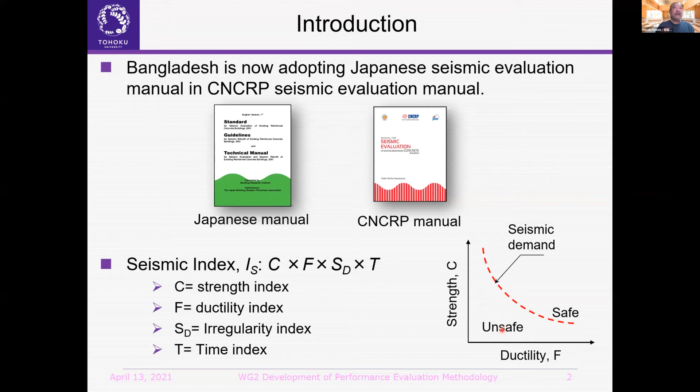The details were already explained in the method for the evaluation of the IS index. So today it's a very good opportunity for me to introduce the background of the IS index for the application to existing building structures just after the earthquake. As Rafikul-san already introduced, the judging criterion for the IS index is 0.6. If the IS index is larger than 0.6, in Japan we consider the seismic capacity is enough against major earthquakes.

And this kind of judging criterion is not only theoretical investigation, but application to damaging earthquakes, and we learned lessons from this earthquake damage. Today I would like to show two examples of the application to existing building structures in Japan. And this is just the case in Japan. We are not thinking this judging criterion is directly applied to Bangladesh, because building type, seismicity and many things are different.

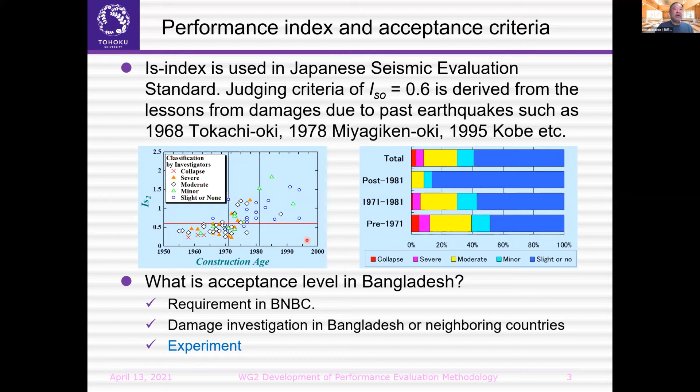So maybe we need to discuss more how much IS index is good for the judging criterion in Bangladesh in the application. But anyway, how we decided and confirmed the IS index of 0.6 is okay, that is our Japanese experience. Please see this. This figure is showing the damage ratio due to the 1995 Kobe earthquake for school buildings. Most of the buildings are 3 or 4 story reinforced concrete structures, and this is the damage ratio of the buildings.

We classified the buildings into 3 groups based on the seismic code revision. In Japan, we revised the seismic design code based on the lessons from earthquakes. The first major revision was done in 1971, and the second one in 1981. The damage ratio is very different based on the seismic code. In the first generation, almost 10% of buildings suffered very severe damage or collapsed, and 30% were moderately damaged. Moderate damage means it is possible to repair, but very heavy repair is necessary.

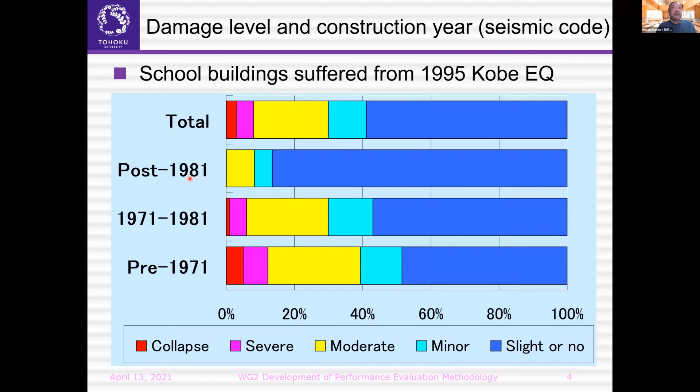And this graph is the same school building, and the vertical axis is the IS index, seismic capacity. And this line, 0.6, is the judging criteria. And this line is construction years, so 1971 and 1981. So here is the first generation, second generation, and third generation.

So again, the tendency is very clear. Before 1971, for most of the buildings the IS index is less than 0.6. And after 81, the data is very few, but for all the buildings the IS index is larger than 0.6. This mark indicates the damage level: collapse, severe or moderate damage. So most of the severely damaged, collapsed or moderately damaged buildings are less than 0.6.

So based on such kind of analysis, we decided to confirm the IS index works well to judge the seismic capacity of building structures. And I think fortunately in Bangladesh, you don't have this kind of severe earthquake. That is why it's a little bit difficult to do the same kind of work on Bangladesh buildings, but maybe you can collect some data not only from Bangladesh but from outside your country. Then you can discuss or check which level is suitable for the judging criteria for seismic evaluation.

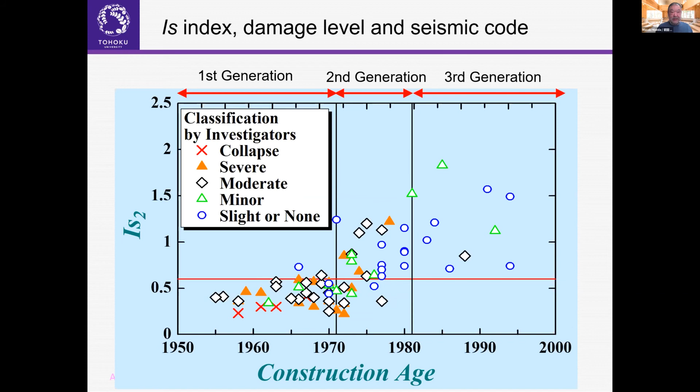And next I'd like to talk about the basic idea of the seismic evaluation or rehabilitation flowcharts in our SATREPS guideline. Of course, our guideline works together with the CNCRP manual. Maybe today we do not have enough time, and I guess we already introduced the visual rating method, a very rapid evaluation or classification of seismic capacity of building structures. In the seismic evaluation stage, we are thinking to prepare two levels, first level evaluation and second level evaluation. This is basically based on a very simple calculation method.

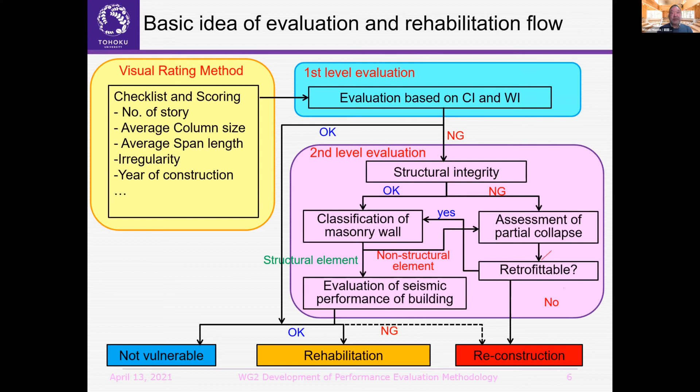But anyway, in our seismic evaluation manual, first we need to consider the structural integrity, and one of the biggest differences between Japan and Bangladesh is the masonry infill wall. In Japan, the masonry infill wall is not popular, so in seismic evaluation it is not taken into account. But in Bangladesh, the masonry infill wall is very popular. That is why we developed some calculation method for the masonry infill. This figure was already explained by Rafikul-san.

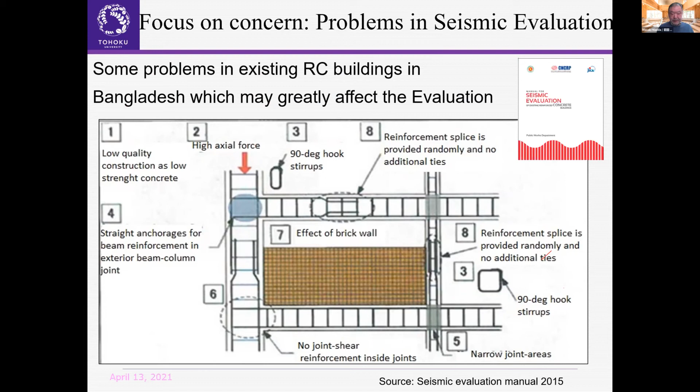At the beginning of our project, we discussed, and the Bangladesh side showed some typical problems to be considered in seismic evaluation. Based on discussion of these characteristics, we picked up the things to be considered in our SATREPS-TSUIB guideline. So from now, after my presentation, 5 items will be presented. We mainly focus on these 5 items for the seismic evaluation, in addition to the CNCRP manual. The first one is the masonry infill wall.

The second one: sometimes in your country the concrete strength is low. In such cases, the failure mechanism, deformation capacity or strength is different from the normal concrete structure. Another very typical structure is flat plate structures. In Japan, the frame structure is very popular, but in Bangladesh, the flat plate structure is very popular. So that's why this is included.

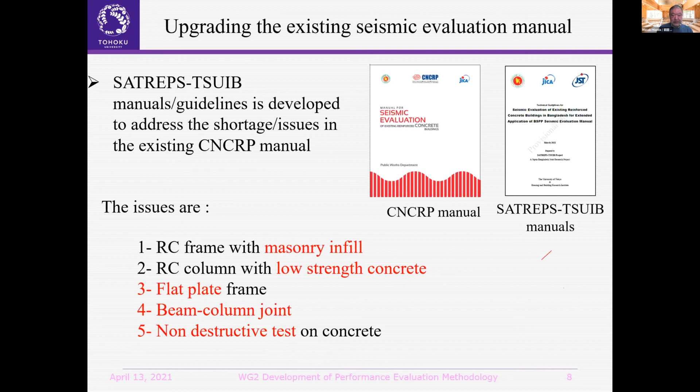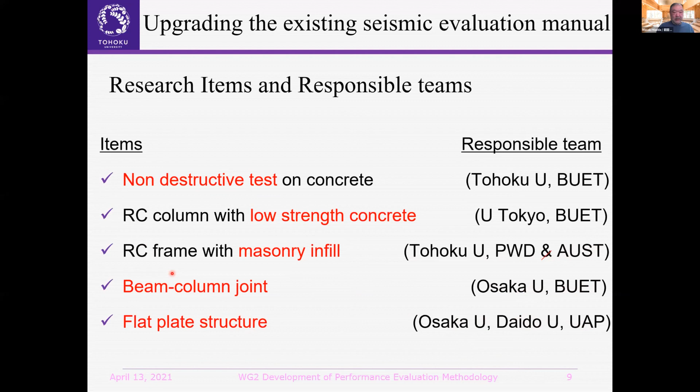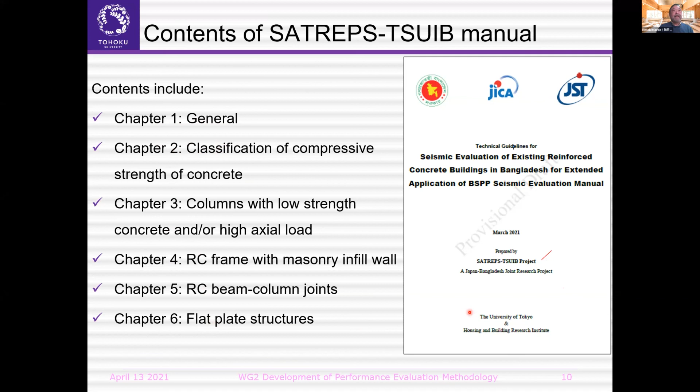And this is the contents. Following the general part, these 5 items will appear in this guideline. Okay, so that's all for the introduction of our project.